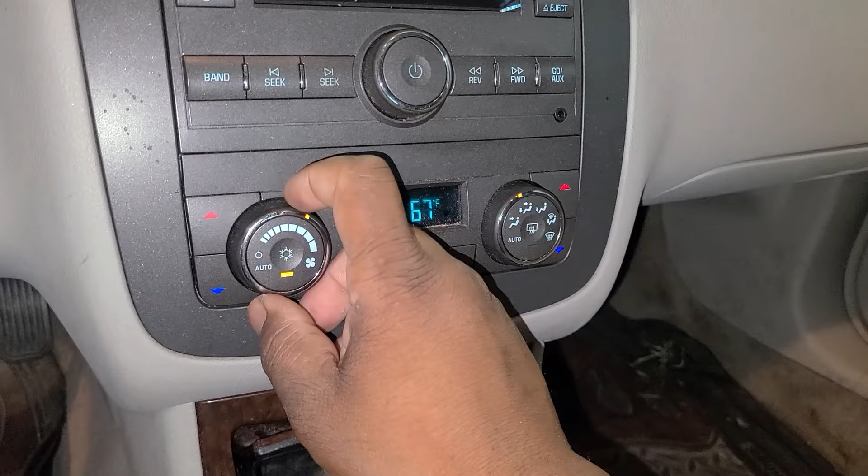So what we have is a Buick Lucerne. The complaint is no air conditioning. So, pretty sure I heard the compressor kick on, but there's nothing blowing out of the vent. So let me see. So do we have this on? Yeah, so we'll throw it on there. We got something. Yeah, there's nothing blowing out of the vent. So let's go under the hood and take a look and see.

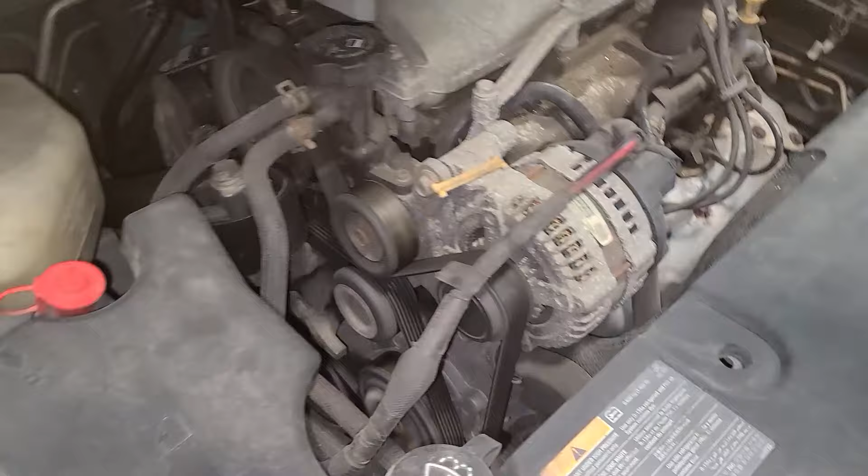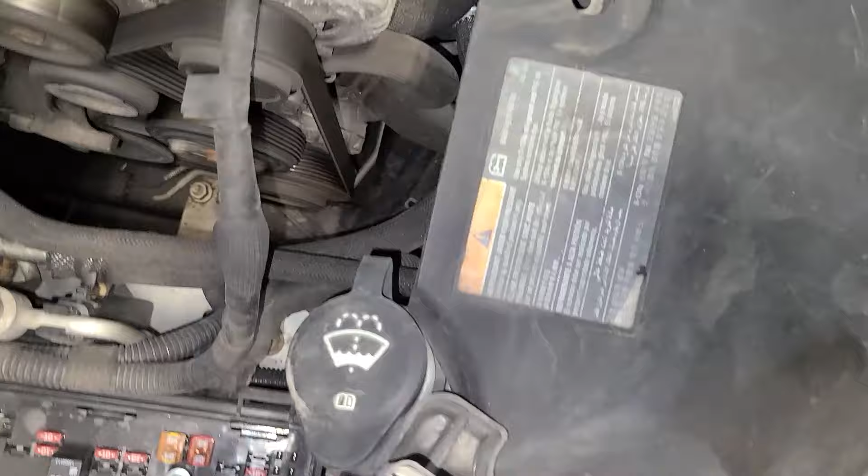Let's see if we can see the compressor is engaged or not. And you can see our compressor is engaged. So we know we have some sort of electrical issue. Let's see what fuses are here. See, do we have a blower motor fuse or something right here?

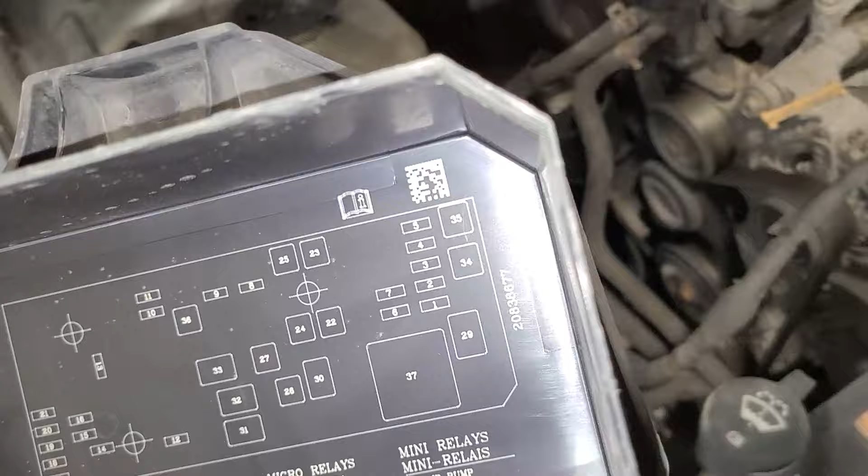So I did not see a blower motor fuse here or relay, but I'm pretty sure there's a separate fuse box. I think these Lucernes have one underneath the back seat here. Let me see what year. And someone has been back here at our fuse box. You can see the cover was already off.

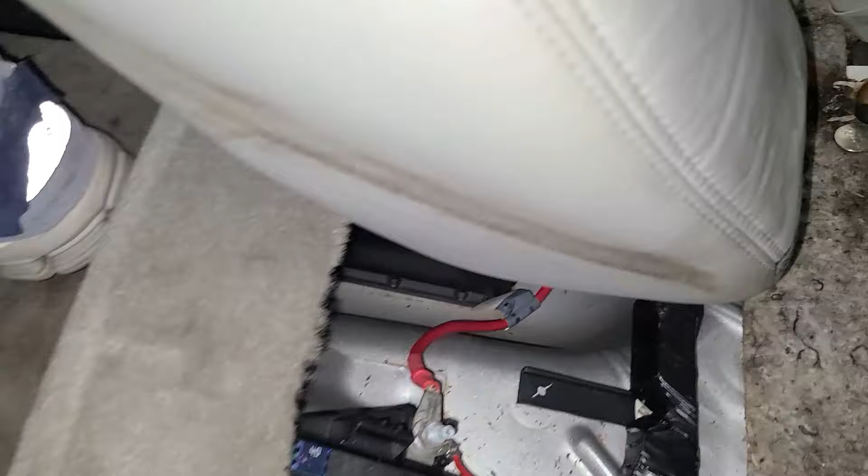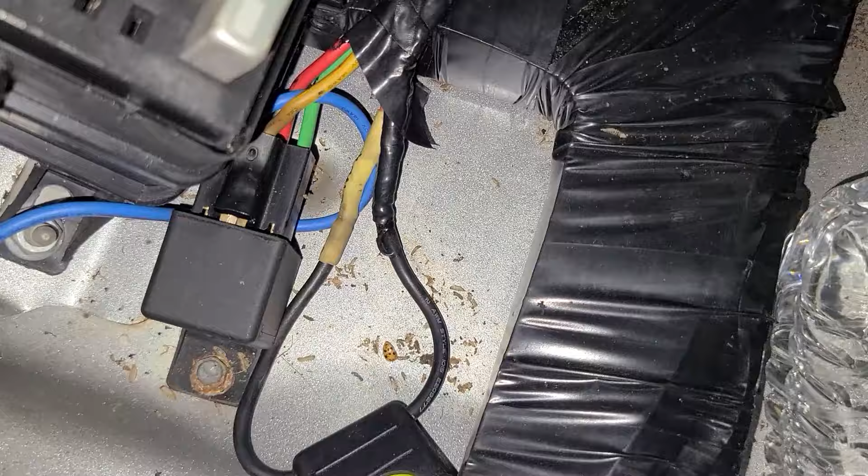Let's move our carpet here. Is that burn? That was burn marks. Oh, you can see we got extra relays back here. See that? That is not correct. And this is, yeah, I'm not sure where this is going, what they got going on there. Let's find our blower motor control devices and fuses, and we'll see what's going on.

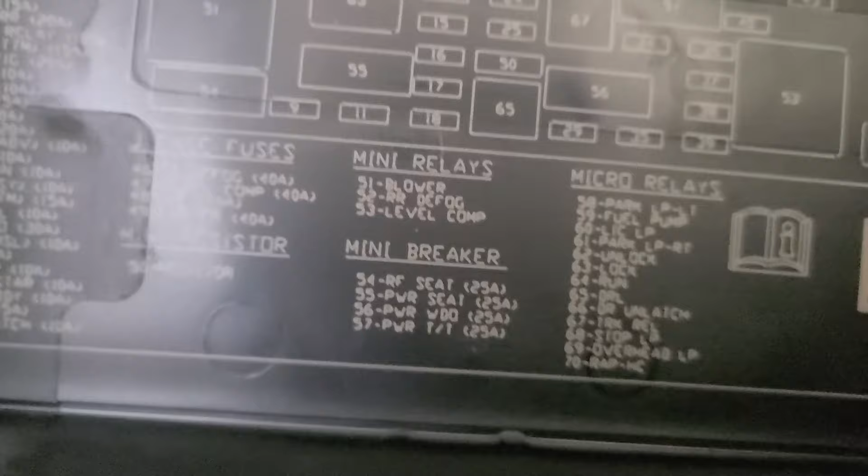So you can see right there, spot number 51. There's a mini relay. So where's 51? 48, 40. So there's 51 right there. Said mini relay, but that thing looks pretty big. And let's look and see, do we have any fuses for it?

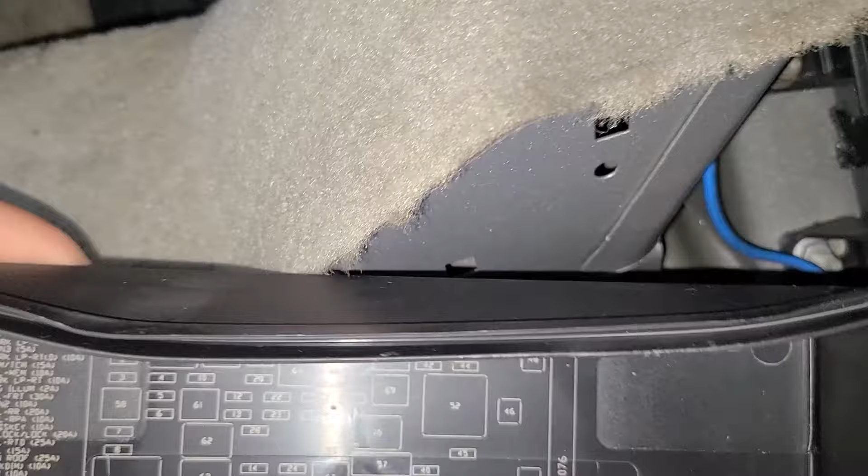Okay, so at a quick glance, I did not see a fuse, but one thing I did notice, if we look at our diagram here, it's like our relay should be right there, and it's not there. So let's see if putting a relay in will have an effect there. I was thinking, since there is this external aftermarket relay, I wonder, is that going to the old circuit for the blower motor?

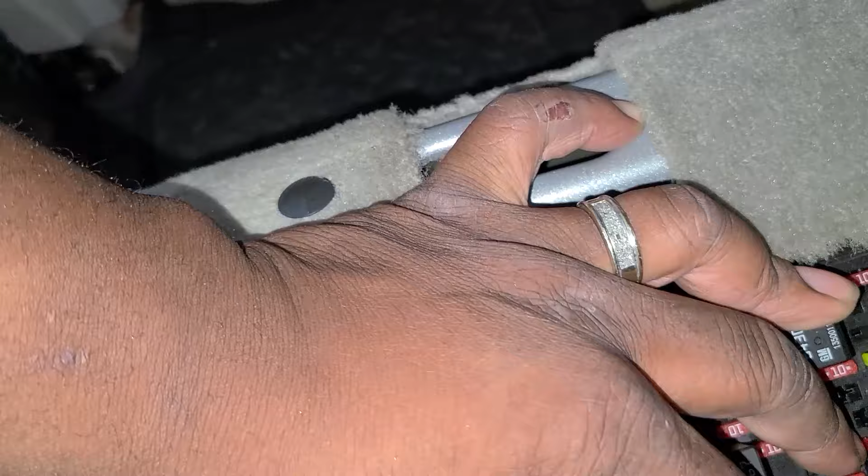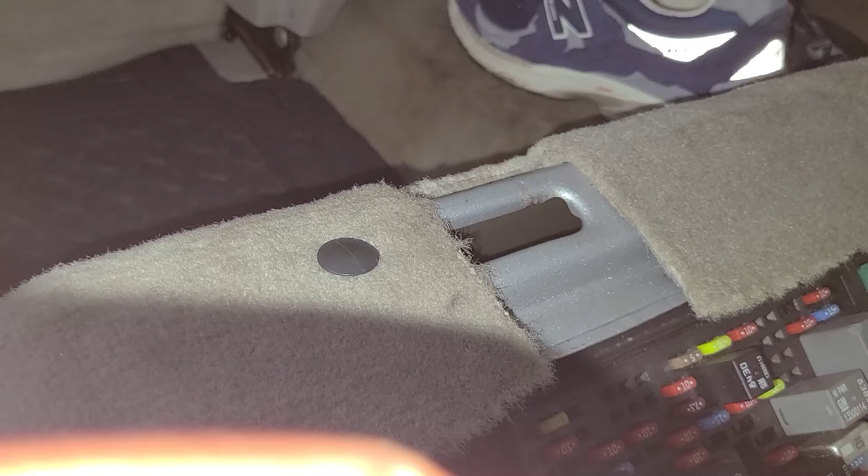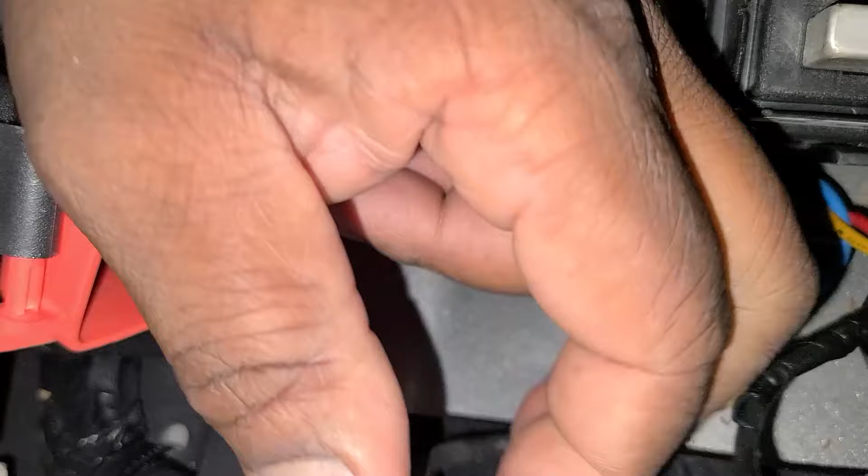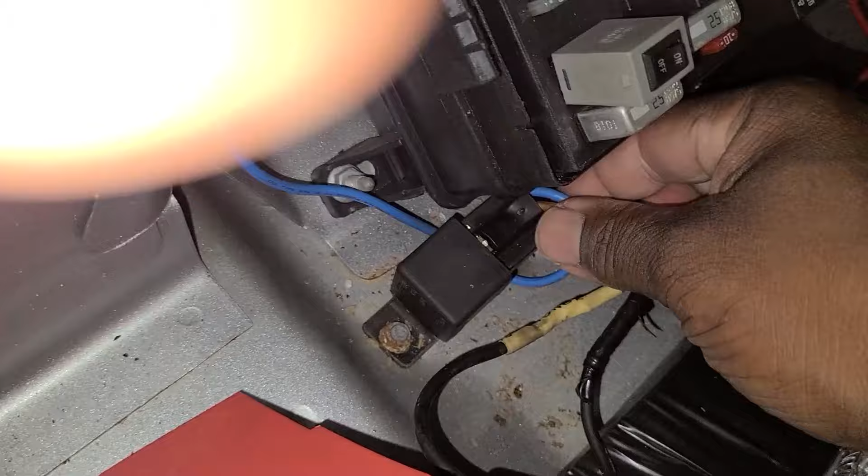So we'll stick our tester in here, which does not. It's not grabbing anything there. Huh. So maybe, I don't think I'm wrong on the spot. Like there's nothing down in there. So maybe they did pull those wires out of there. Huh. See, that fuse doesn't appear to be blown. This relay circuit is definitely melted. Not blown.

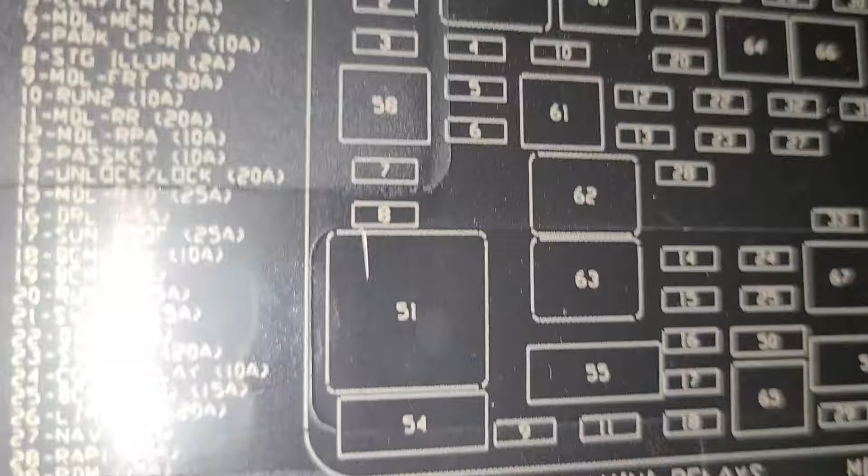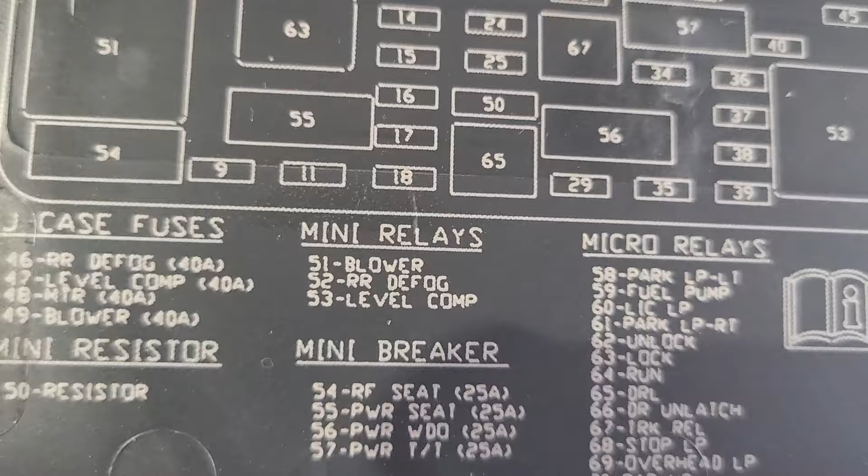Yes, this is definitely our spot here where that relay should go, because there's a 25 amp circuit breaker, and then right above it is a 2 amp fuse, and you can see there, 54 is a circuit breaker, then fuse 8, and that is a 2 amp fuse. So that is our correct spot for 51, our blower relay. So somebody's definitely been in here before. So this should be fun, going behind somebody else.

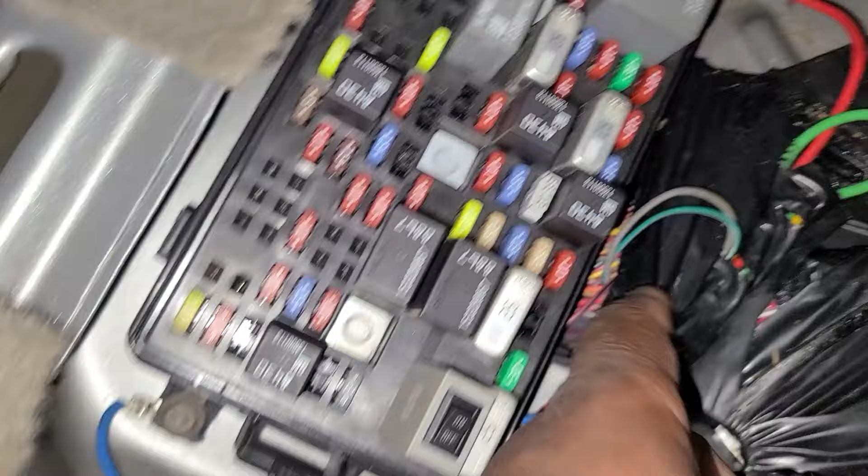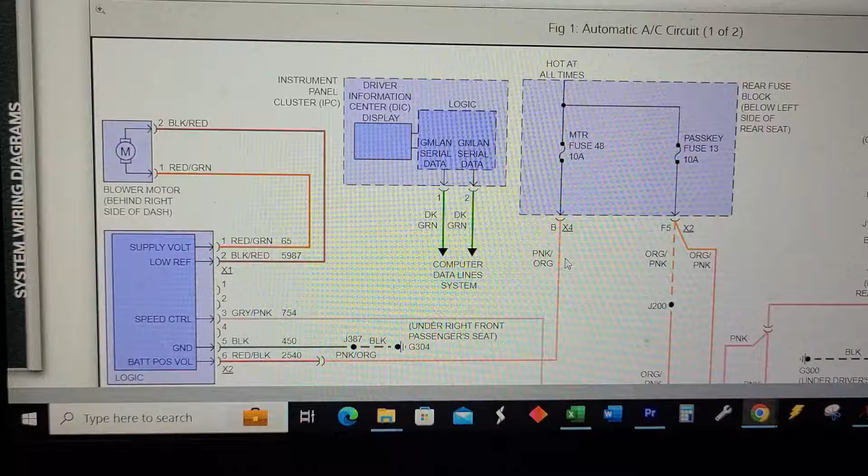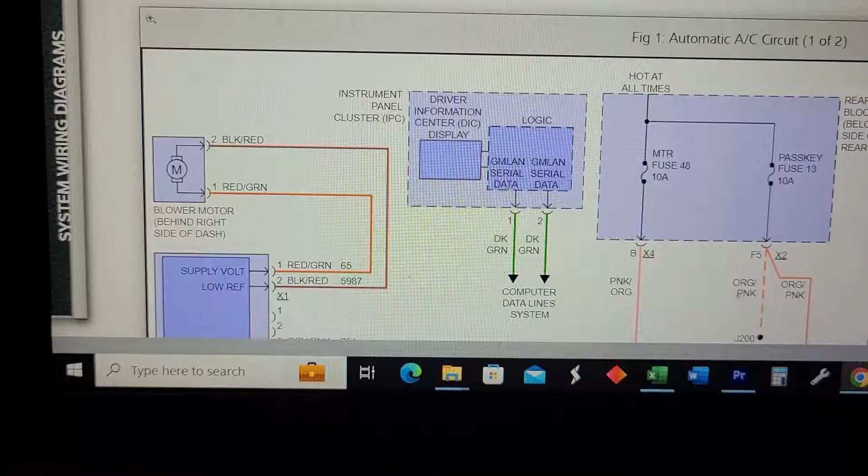So what I'm going to do is I'm going to pull up a wiring diagram for that blower motor relay to see, are the colors of those wires even gray and green with a white tracer? 48 right there, that's in that rear fuse box, and that sends power out to the blower control module. So that relay is not used. That is why there are no terminals in there, and that's why it felt like that.

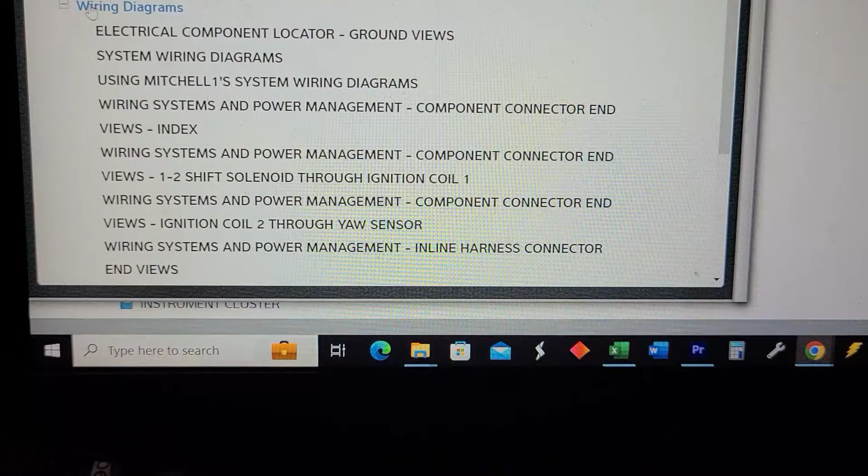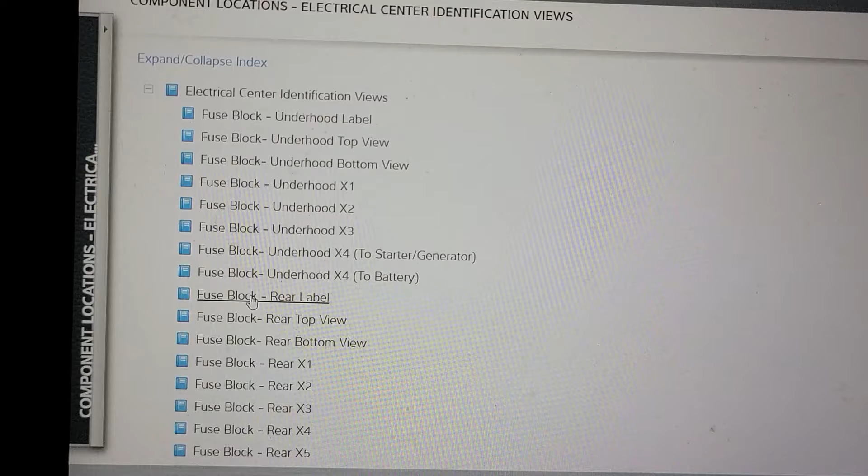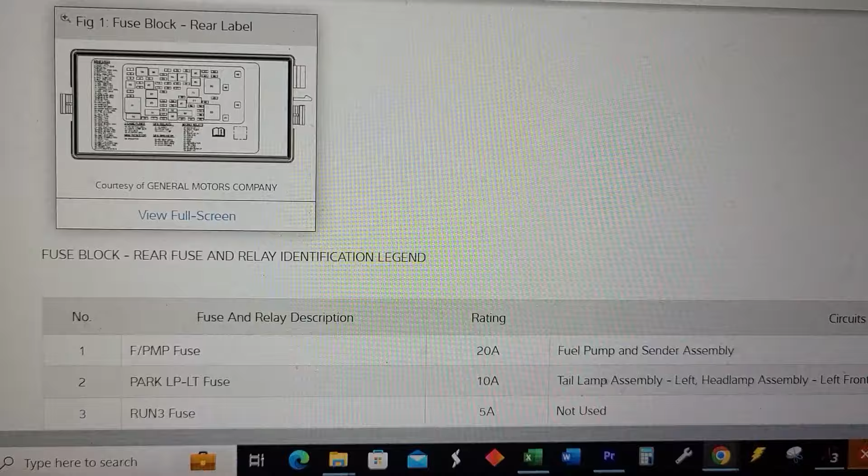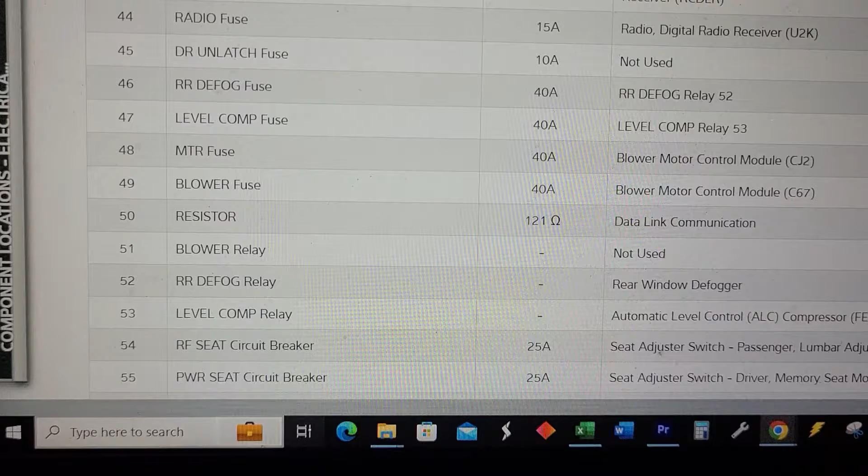And we can prove that by going to our fuses. So we'll go fuses here, components, locations, and rear fuse blocks. Rear label, where is that? So we will enlarge this. And this is our label. So you can see it does say spot 51, which is right here, is supposed to be the blower relay. But if we go to the listing of things in here, we go to spot 51. Here it says blower relay. Then it says not used.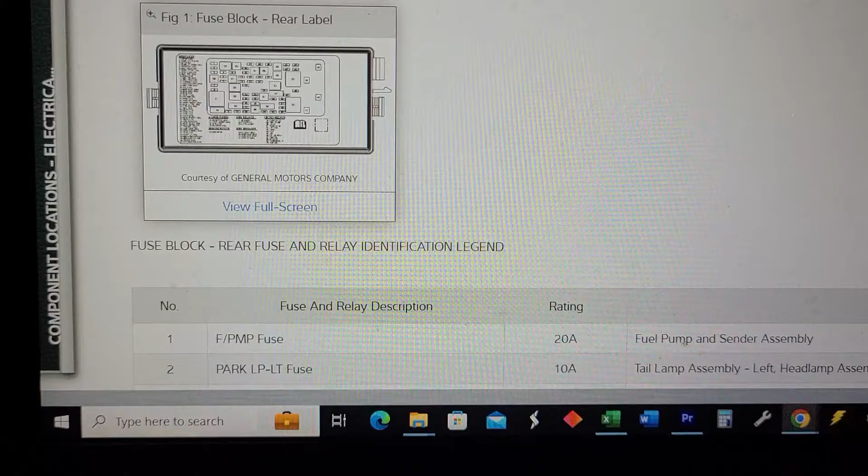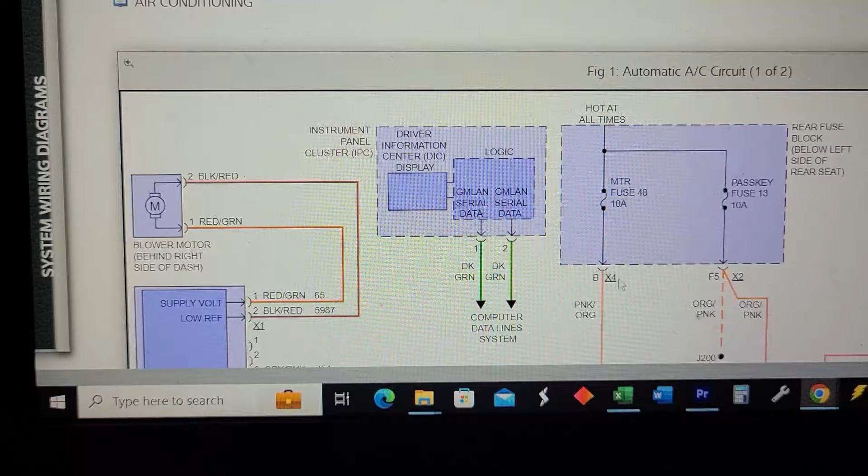So that is correct. So I was incorrect. No one has been messing around with that. That is the way they were built in 2011. So let us go back to our wiring diagram, go air conditioning, and so fuse 48, which is over here, should be good. It should send power out to our blower motor control module, which is most likely going to be on the right side of the lower dash there.

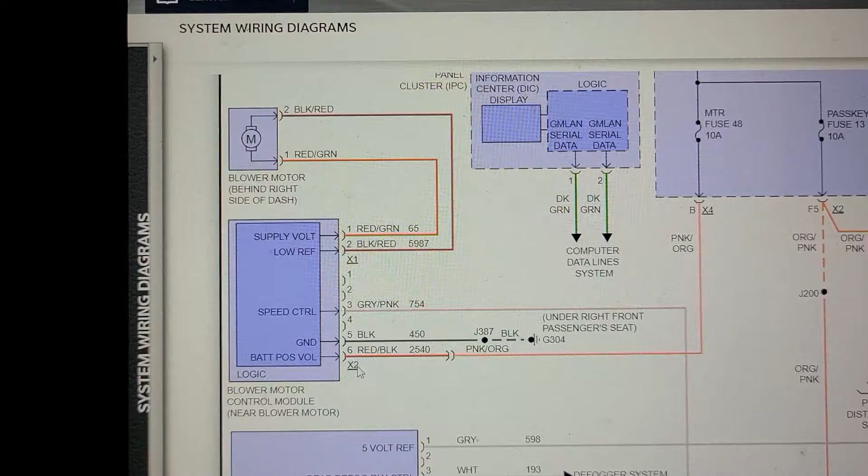And so we should have power on a red and black wire there. That's where that pink and orange wire comes out of the fuse box and turns into a red and black wire. So we should have power at the red and black, and the black wire should be ground. So we're going to check our fuse and then go to our control module.

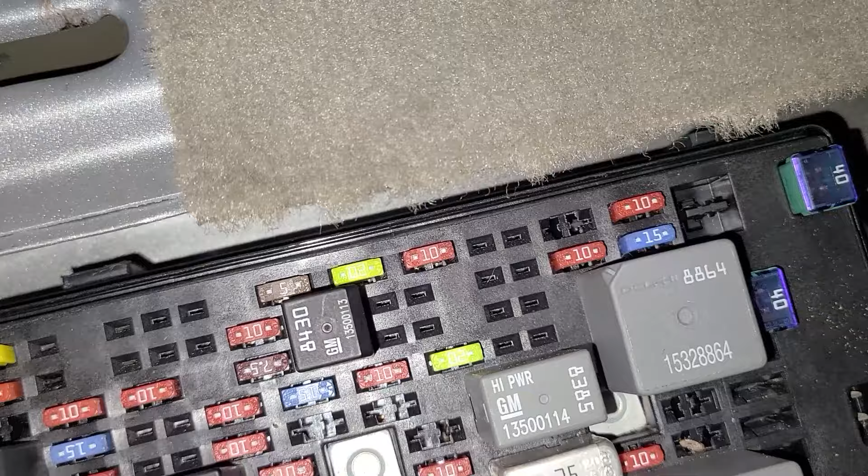So if we go over to spot 49, there's a 40 amp J-case fuse, and according to our diagram, this is where relay 51 that's not used. We go all the way to the other side, and 49 is right there. So we'll come here, and we can see if we go across from our fuse all the way over, spot 49 is empty. So let's just check to see if one of the terminals has power.

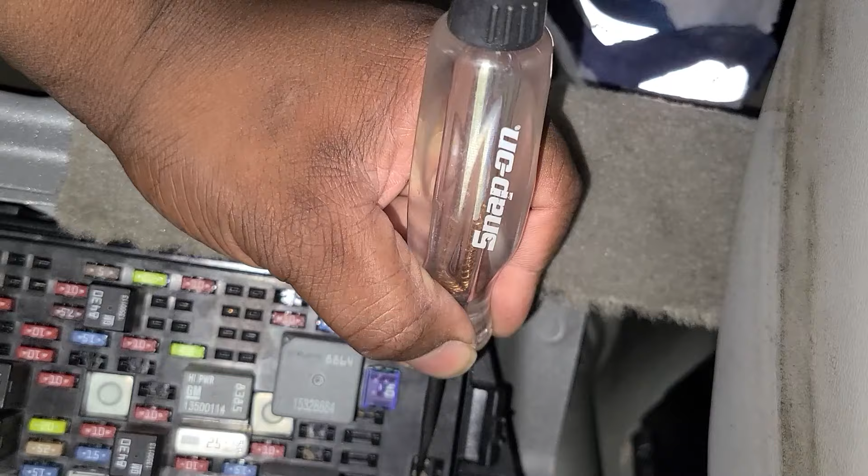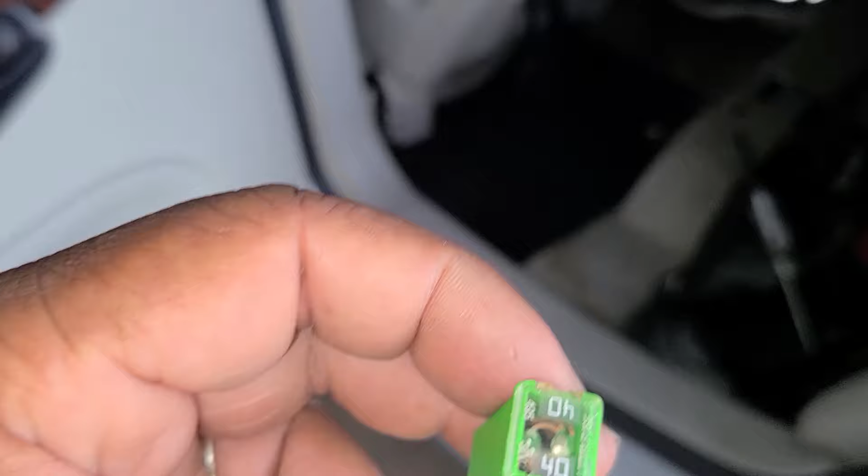And our test light is working. So one of them does have power. So let's go get a 40 amp fuse and see what happens. Okay, so we're back at the car. We got a 40 amp J-case fuse. Let us install it.

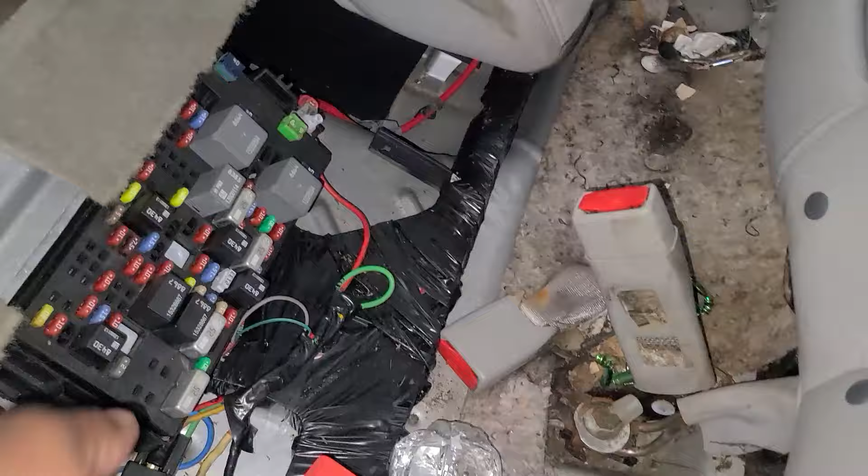And I did not hear our fan come on. So let us move up front and see what is going on there. So we're in on our passenger side. You can see all the dirty fingerprints, so somebody has been here previously.

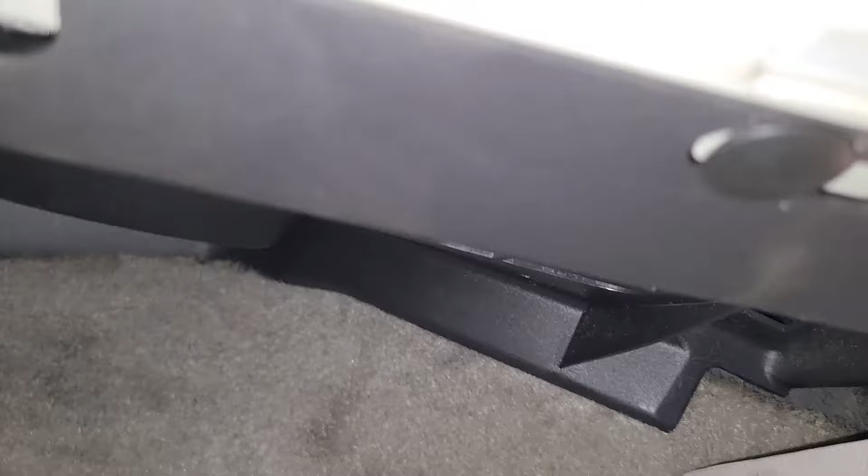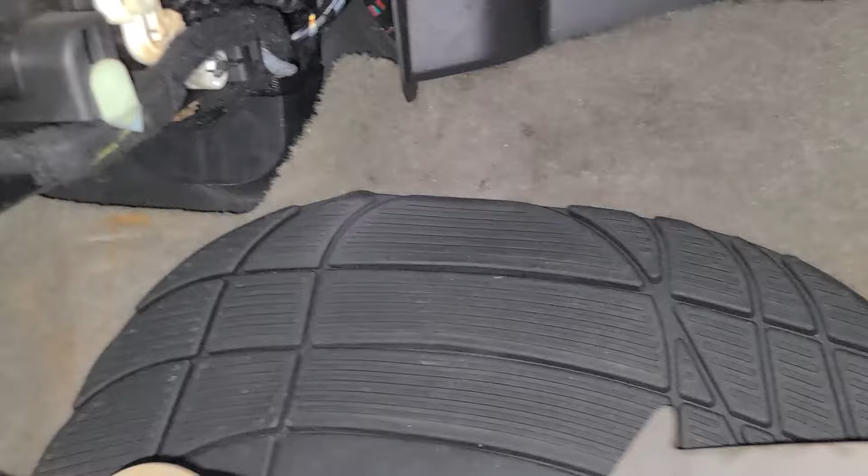So we're gonna get this cover down, which is right now held on with one push pin right there and another one right there. So we'll get that down so we can see what is here, and this should come off. Yeah, somebody was definitely here before. So let's get this out of here.

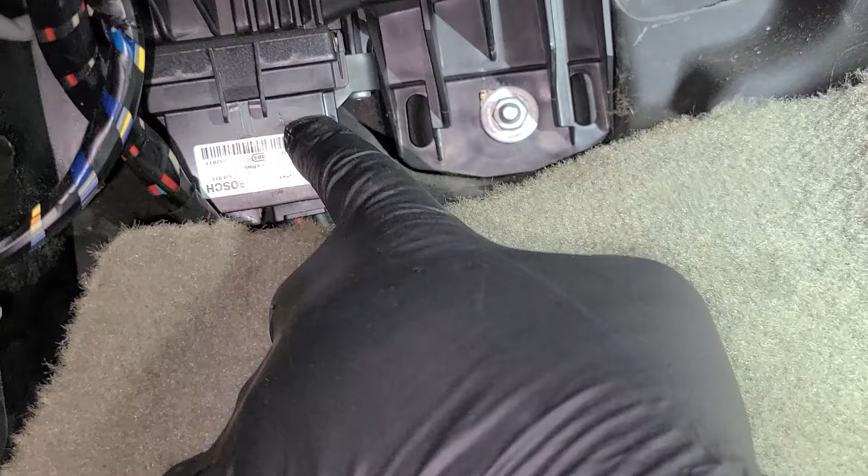Okay, so we have our covers off, and this is our blower motor controller. You can see these two large gauge black with red and black wires. So that black with red is our power source, our constant power, and that black is our constant ground. So we're going to make sure that we are getting power there, and then we may also just try to jump our... no, not yet. Let me just take it slow here.

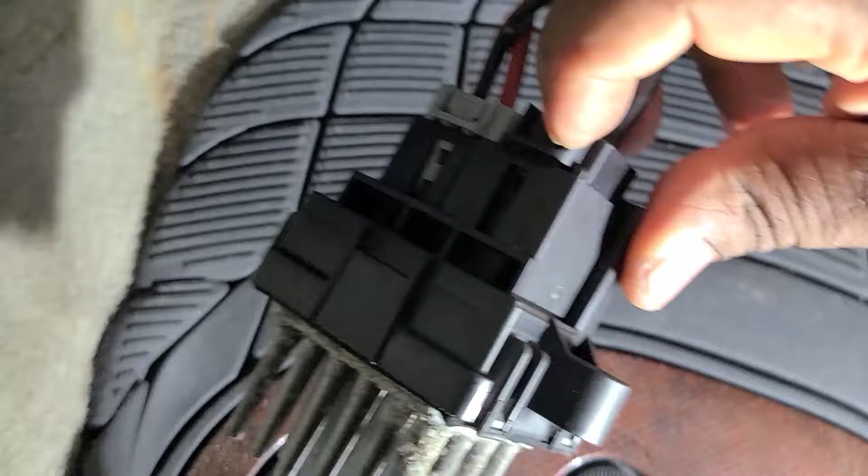So to get better access to the controller, there are 2 Phillips screws that hold it in place. I'm just gonna unscrew those to pull it out so I can get better access to the connectors. So we have our blower control motor relay down. So what we're gonna do is remove our power and ground connector here. So we have that connector removed. So this black side should be ground.

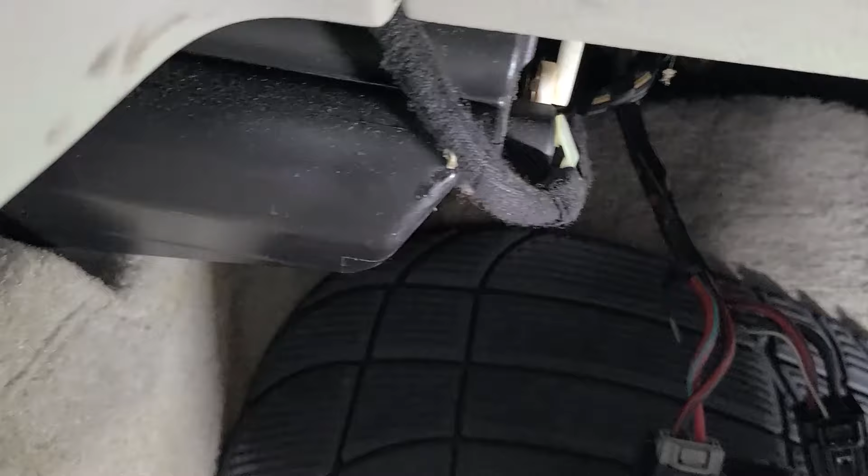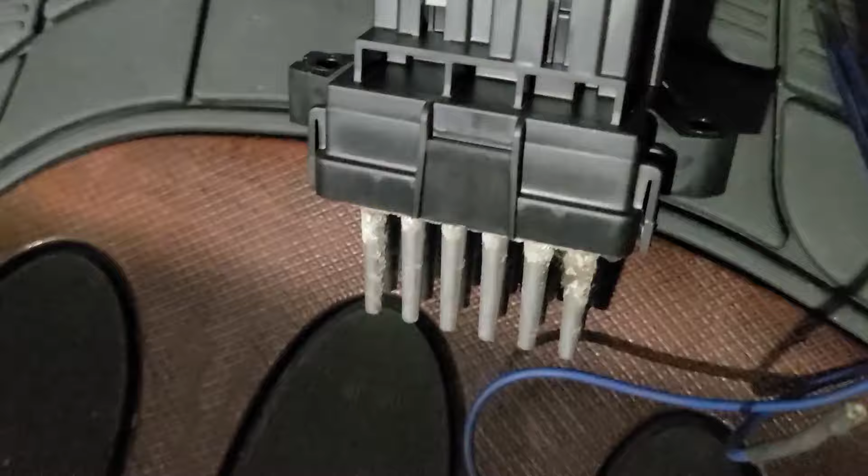And then we will hook our test light up to there. So we got our test light hooked up, and we do need some light, or you guys won't be able to see anything. So you can see right now our test light is not lit, and we should be able to touch it to power with both of them still in here. This is our test light, not lit. We'll go to power, and it is now lit. So that lets us know our ground and our power are all fine.

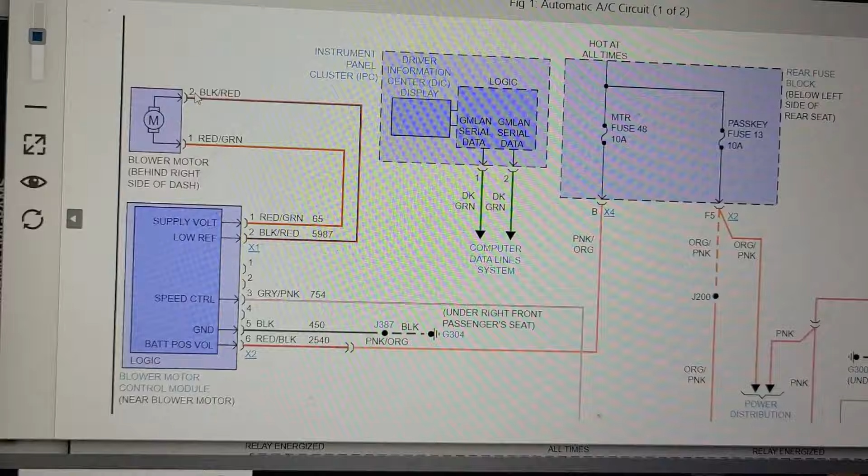So next we just need to check our control diagram again here. Let me get our mouse. So we know we have power coming into our relay. Our fuse, which was missing, we've replaced it. So we have our power here, we have our ground, and we've jumped our blower motor with power and ground, so we know that it works. The only other wire we have not checked is this wire right here.

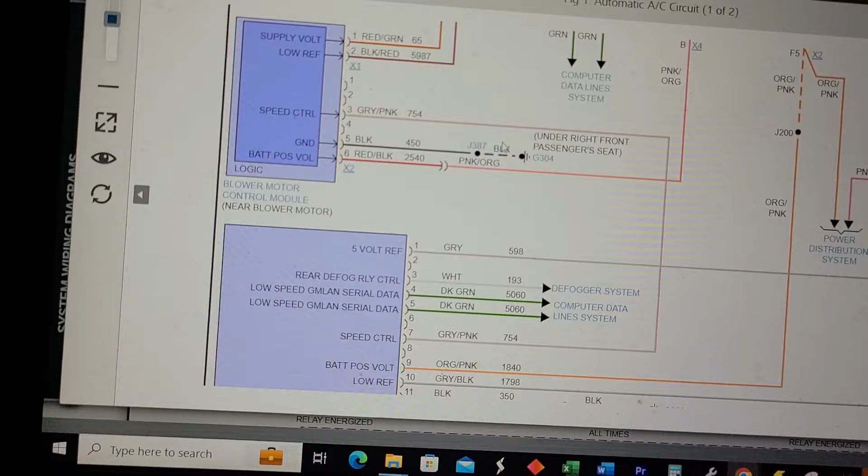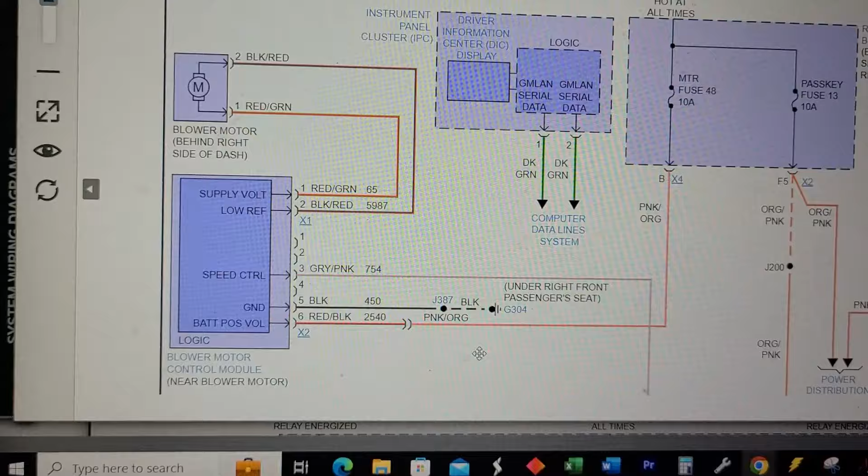And this gray with pink wire is our control wire that comes from our HVAC controller. So our gray with pink comes in from right there. This is our speed control, and this is our HVAC controller. So we need to check that wire, because there has to be a break in that wire. I do not believe this resistor has gone bad, but there has to be a break there.

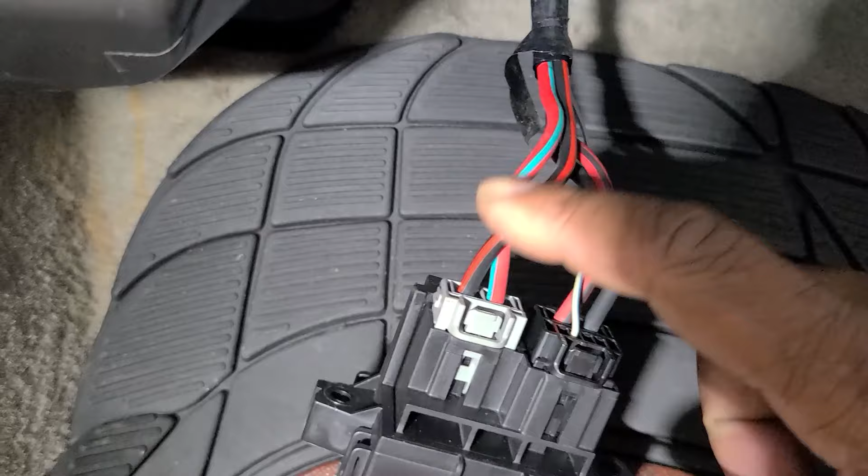But also to confirm, I am going to ground this black with red wire for a second, and it should also power up the fan. So let us go back out to the car and do that. So we're back at our blower motor resistor. On this black with red wire, we should be able to give that a ground and the fan should come on. So here's just a jumper wire going to our ground for our test light there, and we should be able to give that a ground and the fan come on.

And our fan is working. So I am pretty sure that this blower control relay is not bad. So now what I need to check is the continuity between this wire right here, which should be gray with pink, and where it comes out of the HVAC controller.

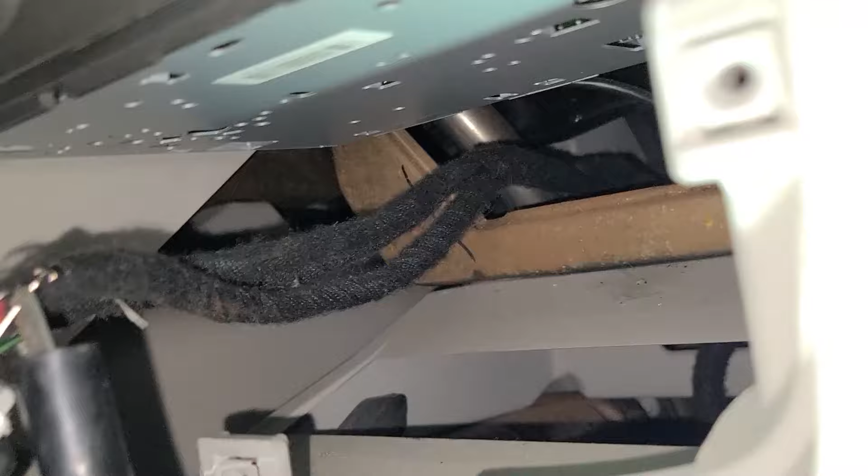Okay, so we've pulled our HVAC controller down and we're on our connector here. So there is a gray with pink wire right there. So if this wire is good, we should have continuity all the way from here to down here on this wire that is gray and pink. And I think that that's our problem for some reason. So we got a jumper.

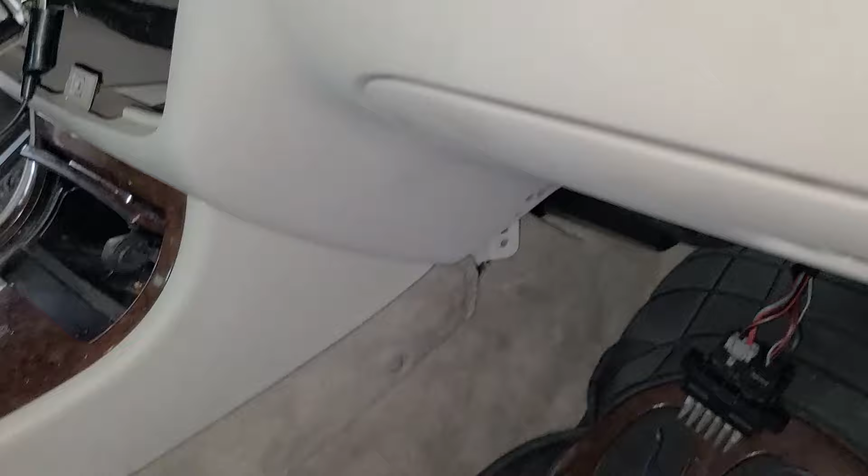So we got some jumper wires hooked up. So we're gonna take our black lead and hook one. So we also have our meter down here. So we got just a bunch of wires going every place. So we don't need this test light anymore, but let me show you what we're gonna do. So we're back probed in on our HVAC control module.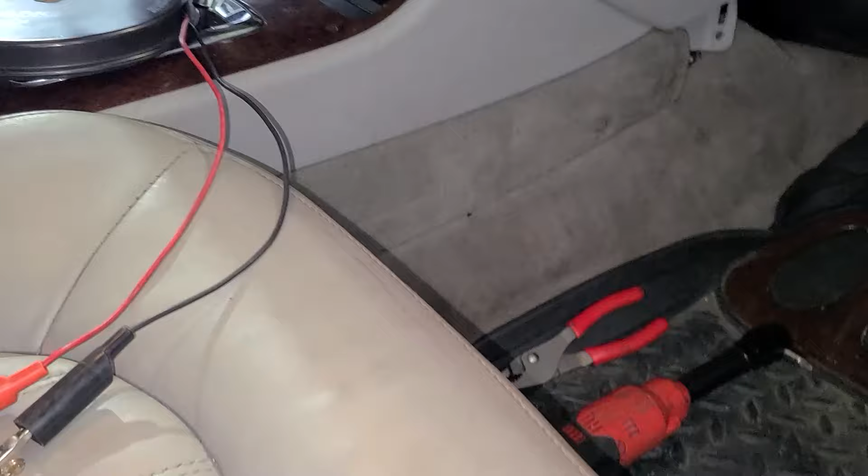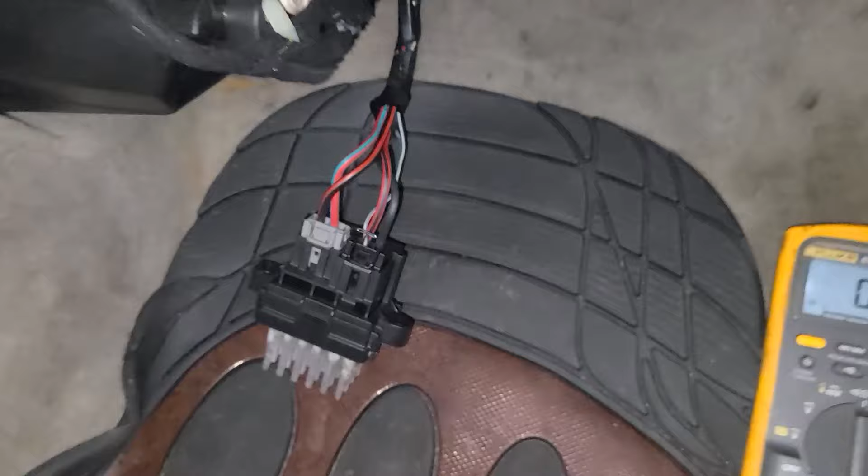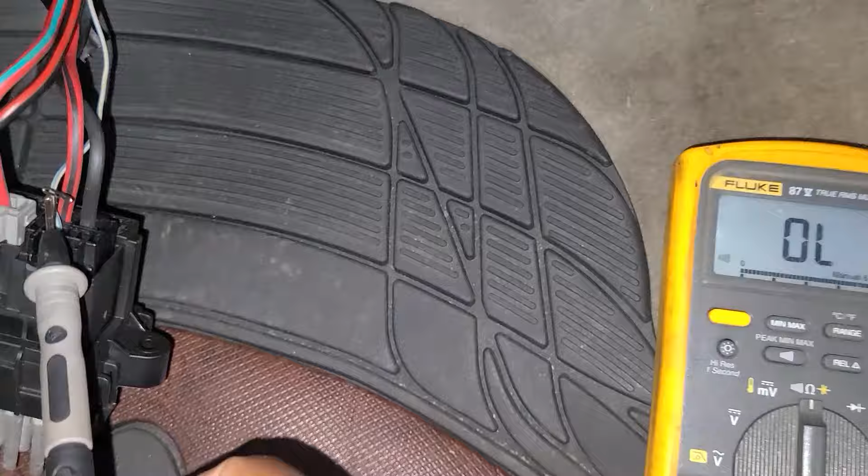So we're back probed in on our HVAC control module. So now you can see, you hear that here. So now we should be able to back probe here and get a reading. Hold on. So we should hear that audible beep and a continuity on our meter. And we are not. So that is a problem.

Hold on one second. Okay, so sorry about that. We had an interruption.

So we're not seeing connectivity there. So that is a problem. So I don't know where this wire is coming from and why it is like that, but we know there's something funky going on in the rear of this car. So I just know what it should be. So since we know our controller is good, it's reading.

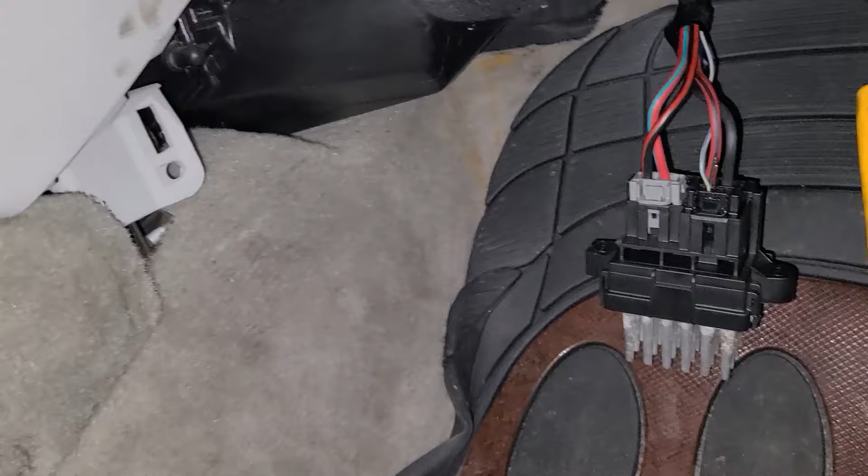So what we should be able to do is jump from this pin right here and then give it that same signal down there, and then it should control the fan. So let us do that. Okay, so our black lead is right here. So let's hook it up and see what happens. And nothing happened. I don't think we're getting a good connection there. Oh yeah, if we turn our dial,

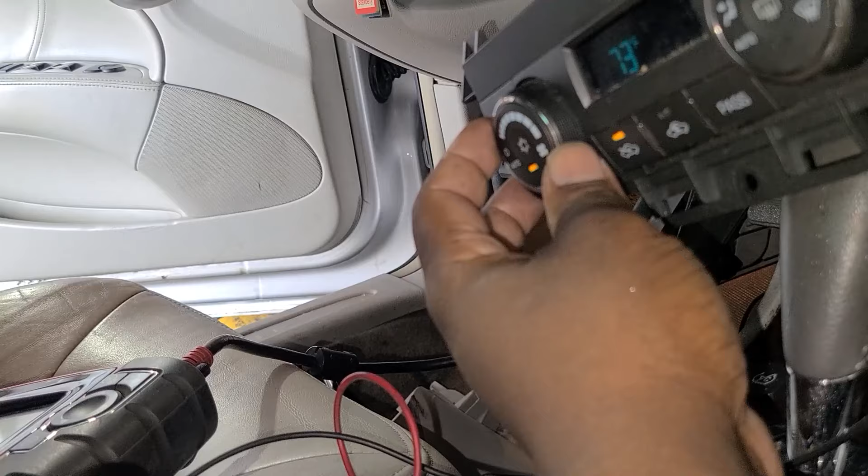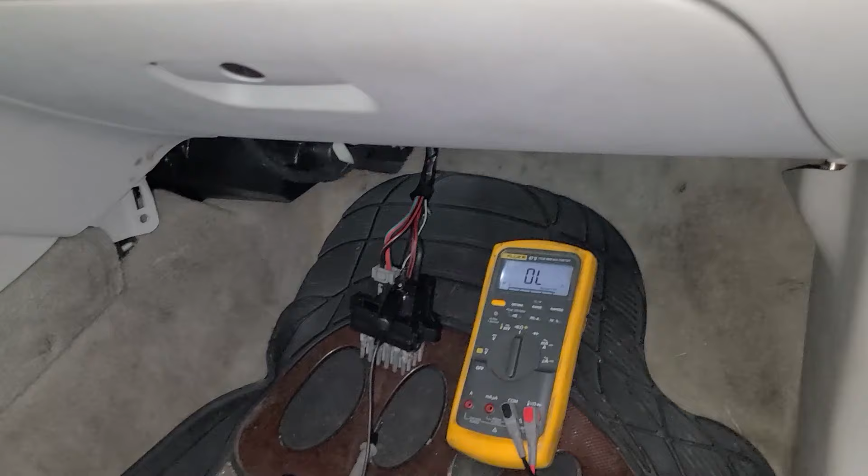so our problem is this wire right here is not connected from the back of the HVAC control module. So what I've got to do is let the customer know that and see how they want to proceed. I hope they'll fix this thing and we just keep it moving.

So this is going to be our wiring repair. We've cut the wire where it goes into the relay. The other end, because I'm not sure where it goes, we just put some adhesive lined heat shrink on it so it'll be out of the way. Then now we are going to run this wire up through and then attach it to our connector and make our fan run as it was designed.

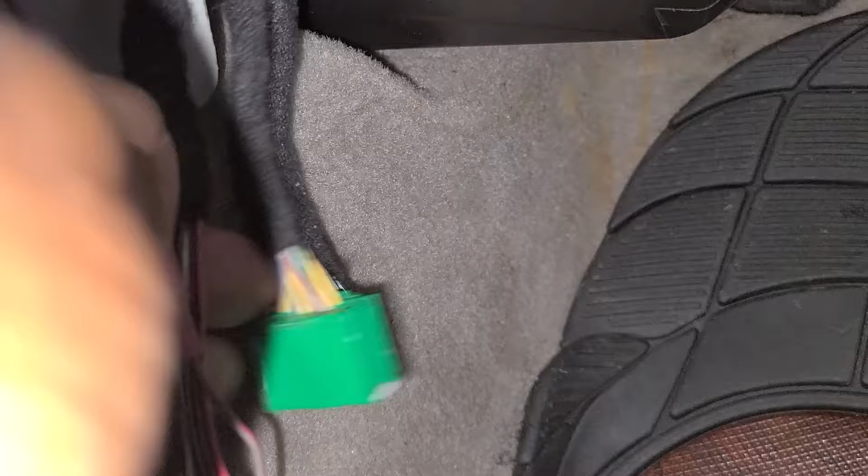So what we've actually done is we've done an overlay, and that's our purple wire. I leave this out on purpose so somebody can tell that someone was here before, just in case something happens with our control circuit of our blower motor. So we will continue to tape this up, and we are using a fiber style harness tape because I think that looks better and offers a little bit better abrasion resistance. So let us finish this up.

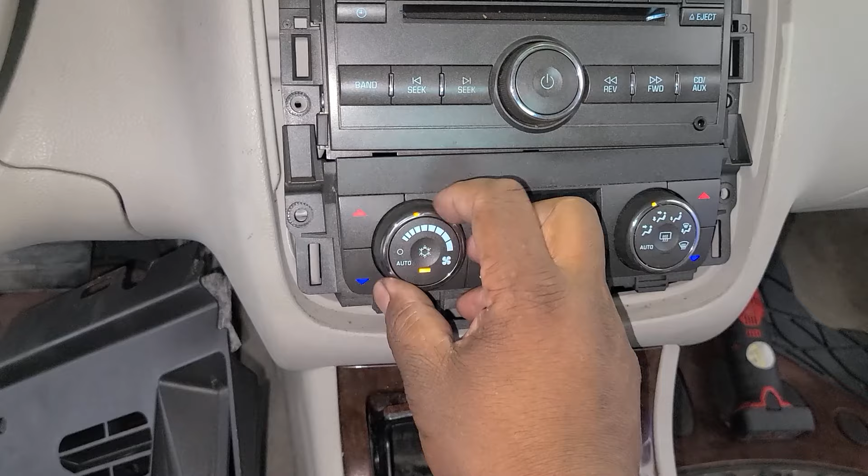Okay, so we got our wiring all done, so we should just be able to fire this thing up and the blower work as it should. So you can hear the fan going, you see the temperature dropping. This thing is all fixed. It's just time to put it back together.

So what our problem was, the speed control wire going from the HVAC controller to our blower motor controller has an open in it. We did a wire overlay, we taped it up and secured it, and it is all fixed.